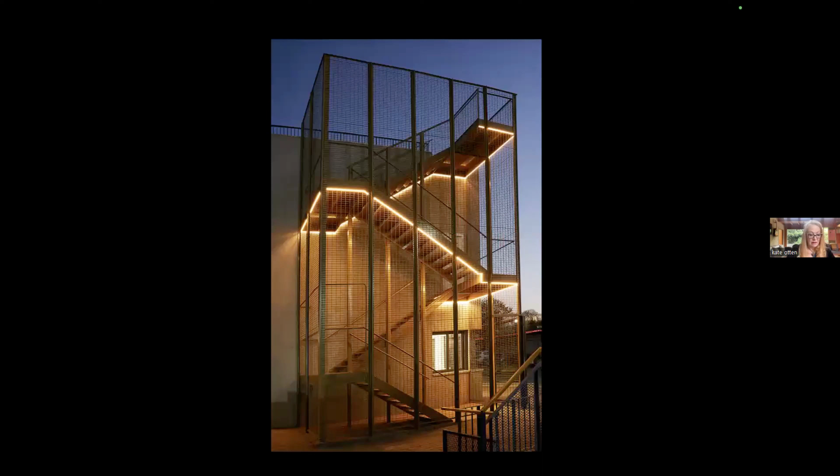Some have a graphic quality. This here is the fire escape stair at night, or the bridge over the M1 highway connecting the east and the west campus of Wits University. The graphic quality can also be captured in a photograph, a moment in time that frames a particular view, mood, or understanding of the building.

Material simplicity and a quiet color palette create a mood of tranquility at this image, which is of the Wits Rural Facility. Or this here, a suburban writer's retreat, this dollhouse at the bottom of her fancy pants Westcliff house. Or the formal reception area of this legal practice that we did their small office for.

This image shows how space can transform an atmosphere. This is the ceiling over a conference facility boardroom, which you can imagine could change the mood of aggressive capitalism to something much more inclusive.

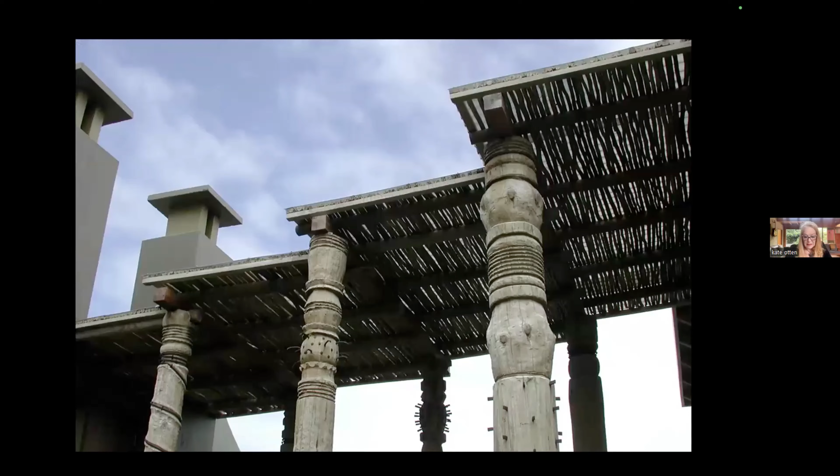The choice of craft and material is a specific response to the context of each project. Available materials, available skills, and how we can use these resources to express the idea of architecture.

You can see here, I mean, you'll see always through my work, gum poles, one of my favorite local materials. And then crafting these things has kind of moved it out of the ordinary and into something unusual and extraordinary.

Or here where the building or the materials respond to, so in Joburg, I'm sure it's the same in Durban, there's an awful lot of fear and worry about security. So this is a courtyard space that's got this kind of curvy cage over it. So while you can sleep with all the doors open, at the same time you can feel safe and secure, and see trees and leaves, and at night the moon, etc.

Or this image here where, instead of having an electric fence that buzzes all the time, we used stainless steel to cut out these kind of plant-like formations.

Animation of the building. So there's been through the work this kind of interaction with craftspeople, encouraging the different personalities within those engaged in the project to express themselves.

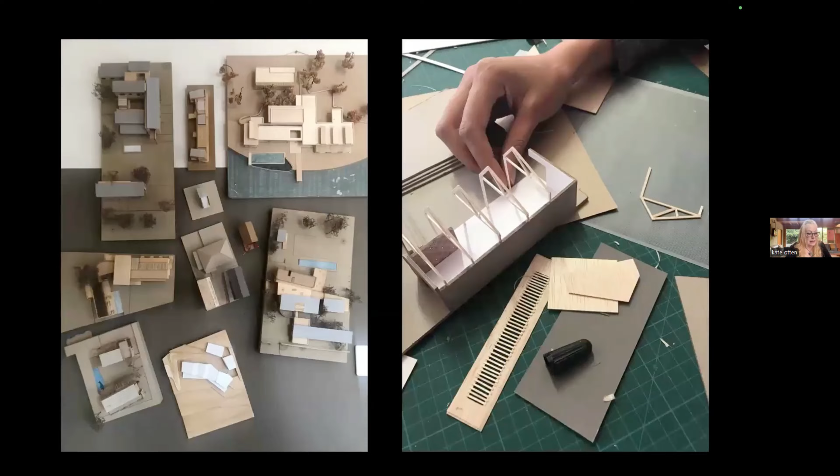We'll talk about that. So hand making is very core to how I operate. Our process of making architecture is iterative and moves between drawing by hand and digital drawing, and then back to hand drawing. We love building physical models and find them a very useful tool for both ourselves and for our clients, and I think models are also this kind of jewel.

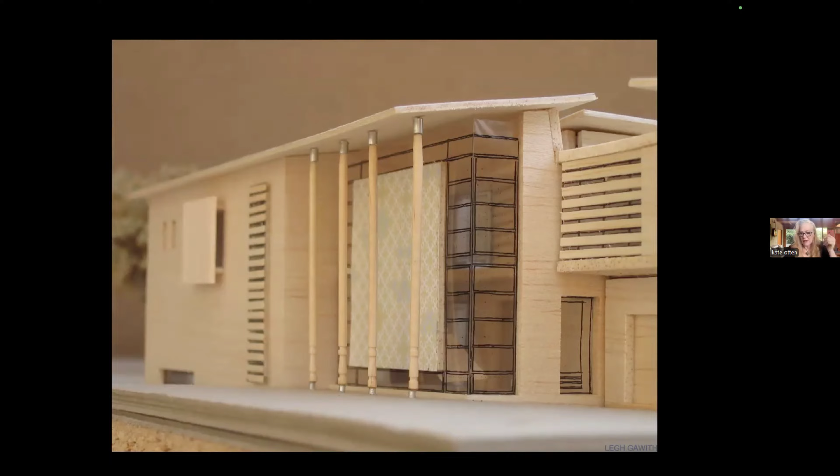When I present models to a client, I usually hide them, and then after having been through the drawings etc., it's kind of like letting the rabbit out of the hat. There's something exquisite about being able to carry your building around, I suppose, just by hand.

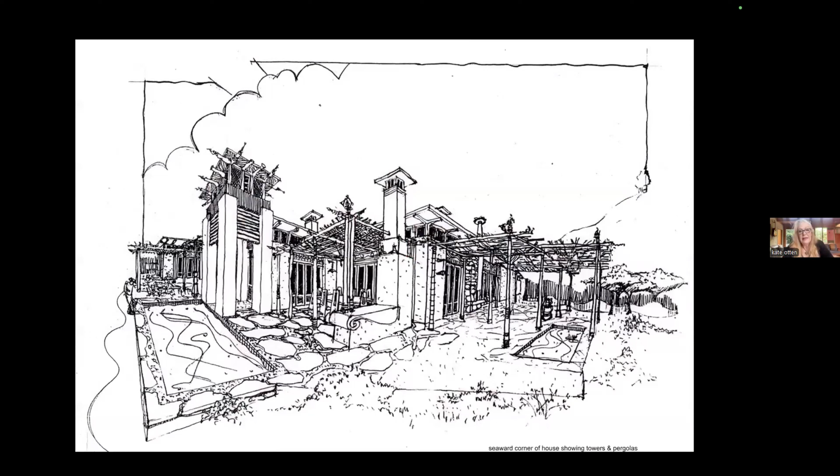So hand—I think it's this connection between hand, eye, mind, and the drawing and the process of drawing. And I've always been and continue to be a very firm believer in the importance of that. I can, as you can see, barely operate a PowerPoint presentation.

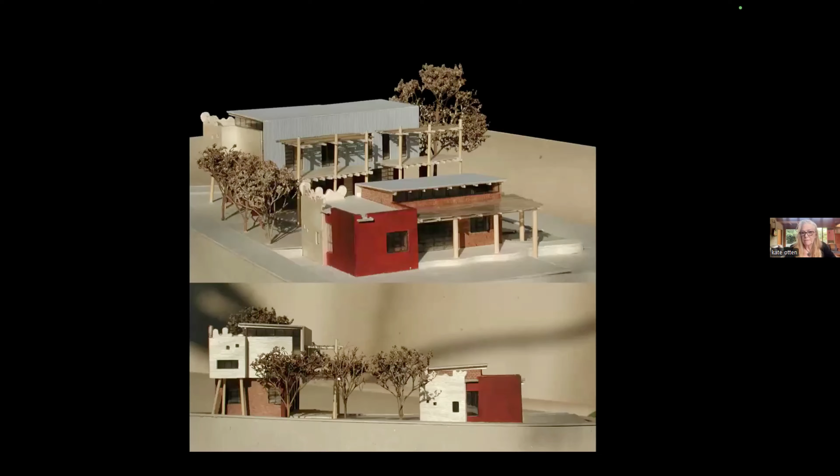No, I've got much better over the years, but I think there's something that only working on a computer you lose—something very particular about scale, but also about the action of which pen, which pencil, what paper, is it rough, is it smooth? How does that influence how you imagine space, together with making models—what triggers how you imagine space.

And I think this was very interesting, and something I often do: to work at a scale of 1 to 1, whereas as an architect you're always drawing things that are not necessarily representative.

So this, for example, we worked the graphics on the computer. It's a gate, the thing is sort of a bit squonk. It's actually a whole flat facade. I'm drawing on this gate, always the dogs lying around with me, and Lele is doing the ones on those.

So we then blew the flowers up, stuck them on, traced over them. The point being, to work at the scale of 1 to 1, to actually physically engage as an architect in painting. You'd be surprised how few architects can actually change a light bulb. I don't know that you should necessarily all be bricklayers, but to be able to physically engage with making, there's something really special about it. This was sort of a 2 or 3 day process, and Lele and I had a really good time. I think he really enjoyed it as well.

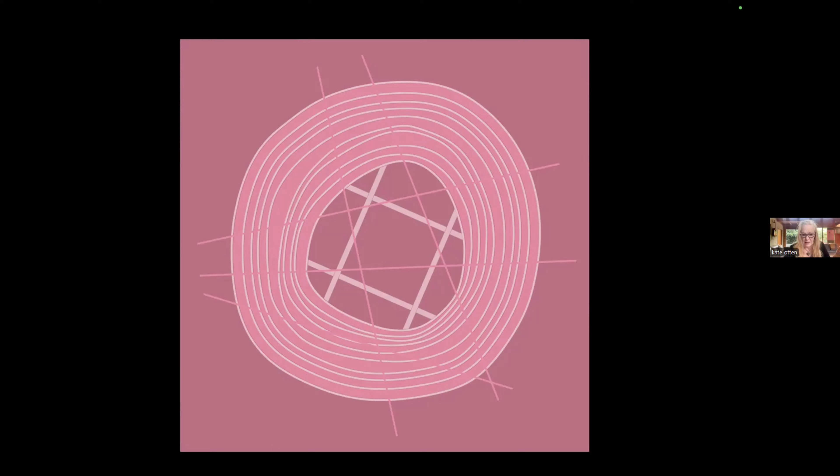And this is a graphic of that roof, which has been generated by a computer. I just think it's a very beautiful drawing. In fact, I think I should hang it on my wall. But what's interesting for me is to arrive at this in reverse is what is, in a way, its beauty, as opposed to having to try to get a computer to make that in order to make this - I think just doesn't work logically. So the hand and the mind and the human factor, I think, is all very important.

This is a mat, so that is the geology under the area of the Vredefort Johannesburg, where the great impact site happened, and how it was meant to be a mat that was part of the exhibition. Never quite happened - it sits now in my dressing room, which is very nice.

But how you can translate what is this diagram into that, which we computer generated, and then made 1 to 1 so that it could then be woven, kind of following a pattern.

And engaging also with artists. So these icons were made by Marco Cianfanelli, and we've sort of over the years had relationships with artists. Clive van den Berg is also one of them who we've often worked with. But I guess that brings another dimension to a structure - the idea of public art, or that you engage at different levels with the building, and it isn't always just this kind of blank glass facade.

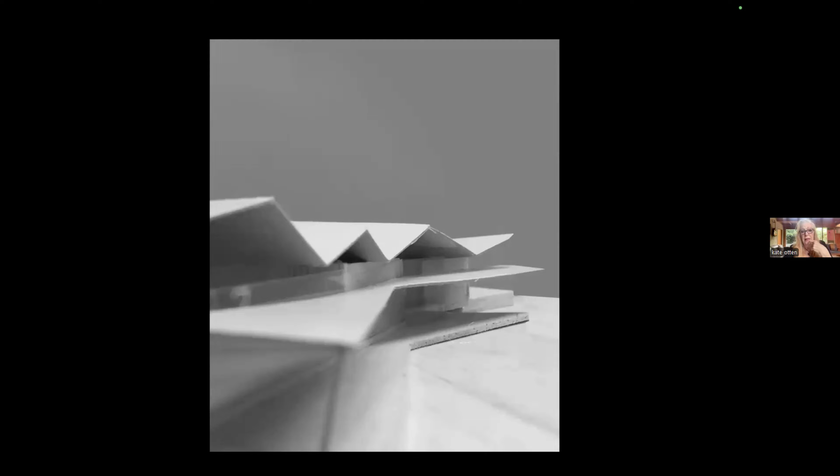Again, models, and there's a thing also for me about photographing models and just how you photograph buildings or moments, as I was talking about earlier, and this is kind of one of them. I think that we should create something so simple and evocative.

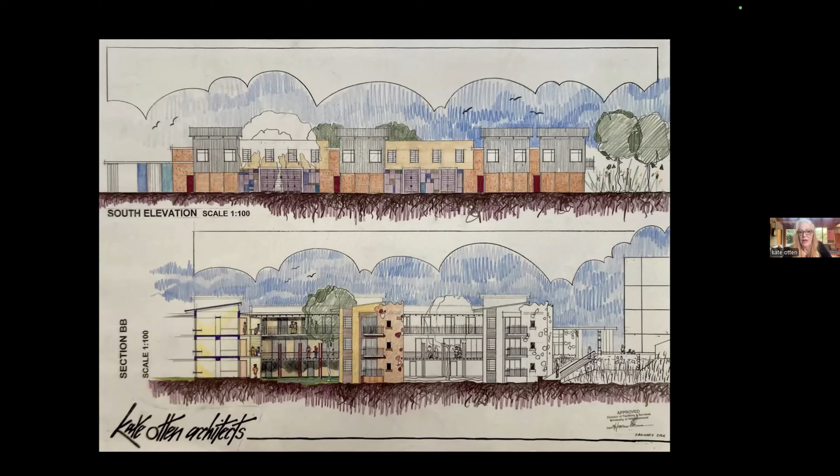And how we used to color in - this is me coloring in a presentation for Wits University for the International House Student Residence, probably 20 years ago, maybe more actually. And using lovely Derwent pencils that were given to me for my 21st. I think it's something that people just don't do. Or making this model, which is a lot more kind of cheerful and animated. And I think also about scale - so this is fabric, shweshwe fabric that's been photographed or scanned and blown up, and so you get this very lovely patterned effect that happens there.

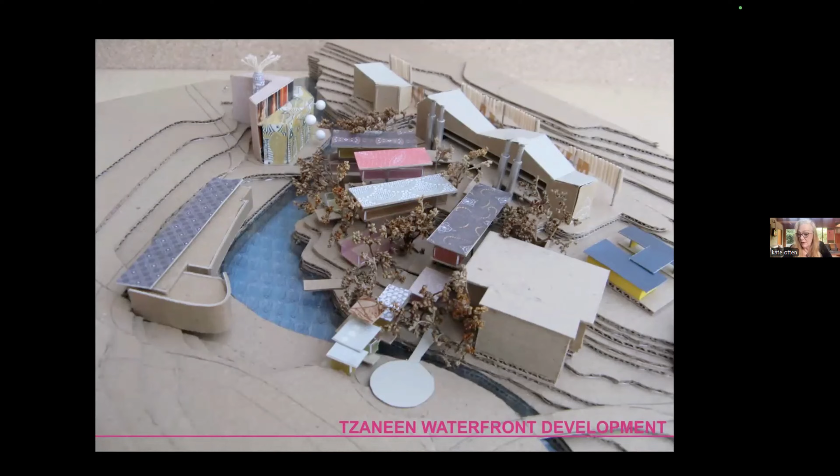Moving to also heritage buildings, which have been - so the women's jail is probably the first one that I did, that I think...

I'm going to read this because it's easier than mumbling along. We have a real interest in working with built heritage, which for us always raises the question of whose heritage, and involves particularly careful research, thought, and engagement, especially when working on important public buildings like the women's jail. We describe the work as rescripting, as it is not about slavishly restoring colonial edifices, but rather about revealing the story of these buildings and the people who inhabited them.

Also, I think, which is important in this building, and in other heritage work, is to suggest a future. Particularly important in the women's jail, as opposed to it being high architecture accessible to a few elite, to make a building that is really quite open and obvious to the public.

So this idea of jumping out, the building kind of jumps out at the confines of the prison. And that symbolism, done so overtly, was a very particular decision made. It also happens at the entrance to the Constitution Hill building, with the Hillbrow Tower in the background.

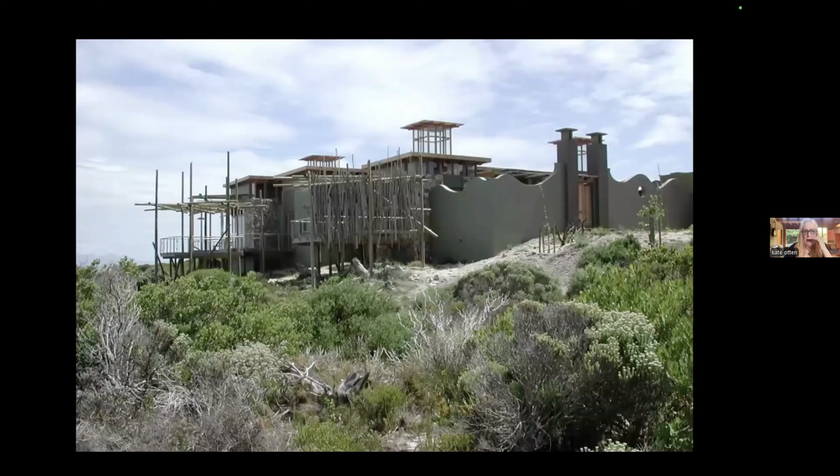The next few images talk about landscape and how buildings fit into their landscape. Here's this South African condition of fencing, which is exhausting. But the building has been designed to be fragmented and quite horizontal, using this in the Cape in Pringle Bay, using the colors of the fynbos so that it recedes and becomes part of the landscape. You see all the materials, the stone, etc., comes from the landscape, so it doesn't poke out as a big lump, and there's also interest in pattern and how that looks against the sky.

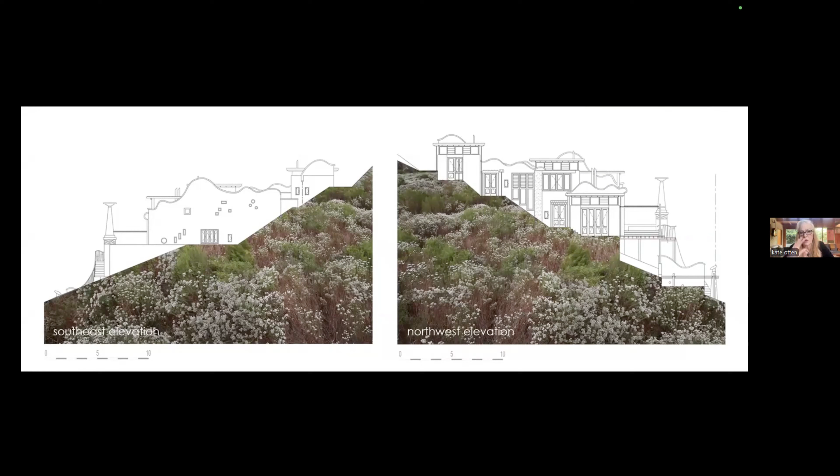This is Misty Cliffs, a similar kind of landscape but much steeper, and again all the stone used from the site, colors, etc. You can see the shapes of the structure reflecting the mountains it's surrounded by, as it wanders or steps down the mountain, informed by the surrounds, by the landscape.

Or this in an urban context, where this very long 25-meter lap pool, which is also a biopool, integrates with the building.

And here the public space of the street is integrated into the building, which is unusual in Joburg because people are so concerned about high walls and electric fences. So to invite the public in—this is often used as a place where people come for wedding photos, or just lots of social media images where people sit and pose, and it's rather lovely. This building is in Parkhurst, on a high street.

This line of the veranda is in fact the edge of the site, but instead of maximizing the retail space and leaving a very puny space to walk through, the buildings are set back so you walk undercover and do exactly what these two women are doing—linger and look—which is really what the retail part is trying to gain.

Materials, and the idea of the boundary—this is a retaining wall, on the boundary of quite a fast, busy road, Jan Smuts Avenue—so the building becomes a layering of plants and kind of disappears into the landscape.

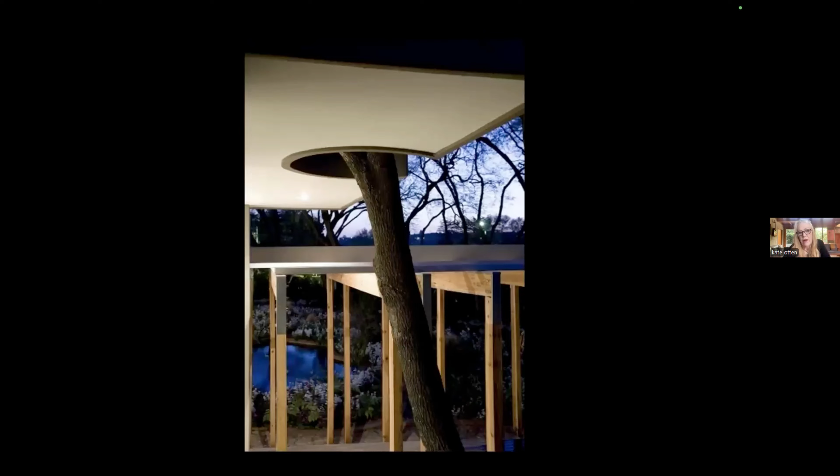So to do that, I think, is a very Joburg thing. And then the other way around, where the building can, if you like, yield to the garden, to the planting, to what is existing there.

That happens particularly at the Wits Rural Facility, where the buildings move and meander and wander through a lot of the existing indigenous trees. We only ever took away two trees, despite it being quite densely wooded - one was an exotic, and one was not endemic to the area.

And how the outside and the inside have this relationship. So having this large glass facade, which would normally be a cooker, but it's in this garden with all these beautiful trees. You get this wonderful dappled light and a wonderful scent from the gardens, from the flowers.

Using this landscape, inside and outside, you can create - this is a kind of small meeting space for where the partner would meet with his silks before court. You can imagine how the ease with which you might communicate is different to sitting in a very formal environment.

And the inside and the outside - here the roof goes from the inside to the outside, confusing that and inviting both one to the other.

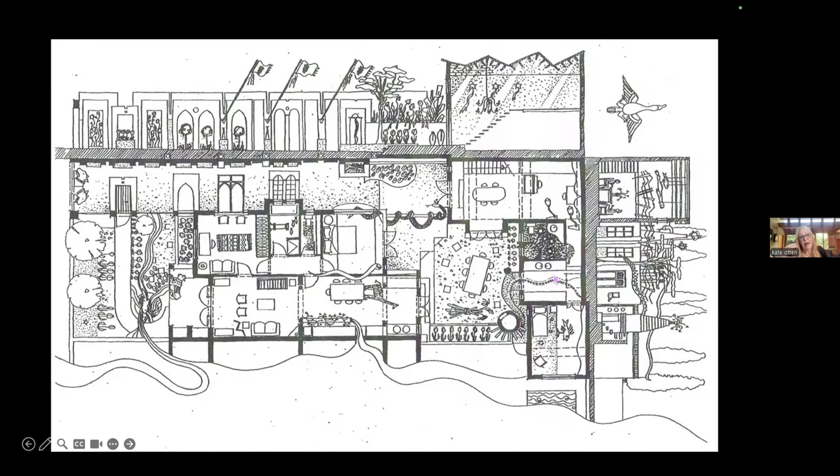And my fondness for creatures and animals, and everything that gets inhabited and thought about. The structure of this being an undulating roof done with corrugated iron, but in the opposite direction.

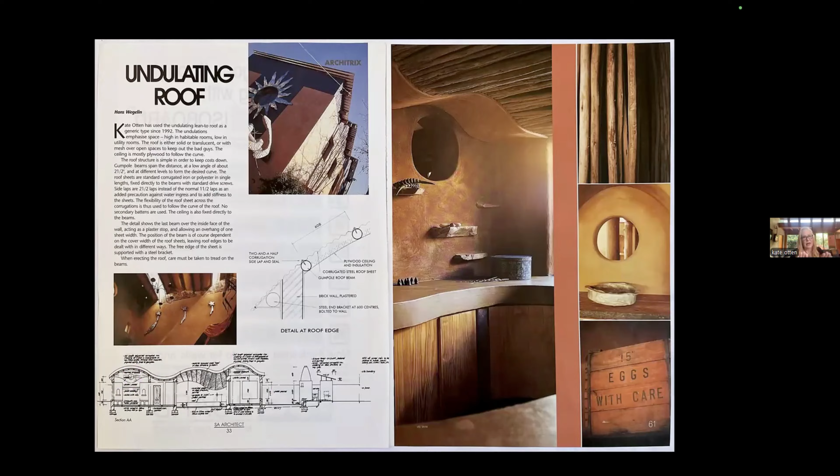So instead of cranking the sheeting, it actually just falls - you build a whole regular roof and then tip the whole roof.

That idea of how that worked then became something that we used in clients' houses, but also this very hands-on collecting of materials from, I suppose, demolitions or just unloved pieces on the side of the road.

The house in Utopia, which was a gift to my partner, so it was wrapped in a red ribbon. Wasn't such a loved gift, but nonetheless, we moved along from that - but there was our house in Utopia.

Here testing, you can see how this plaster is raked and how that became part of what is our house now. All these cantilevering stairs where you build in on the one side - you build them flat on the ground and then build them in as you would bricks or lintels, so that you can create a staircase that way.

A painting done by Adriette of what's on my pencil case.

So this here then is the property that I've owned - it's nearly not mine - that goes from the one street all the way down to the bottom of Melville, a very steep hill. This here was built out of all the rock that we found on site, small pieces of rock built as a double skin as you would a brick.

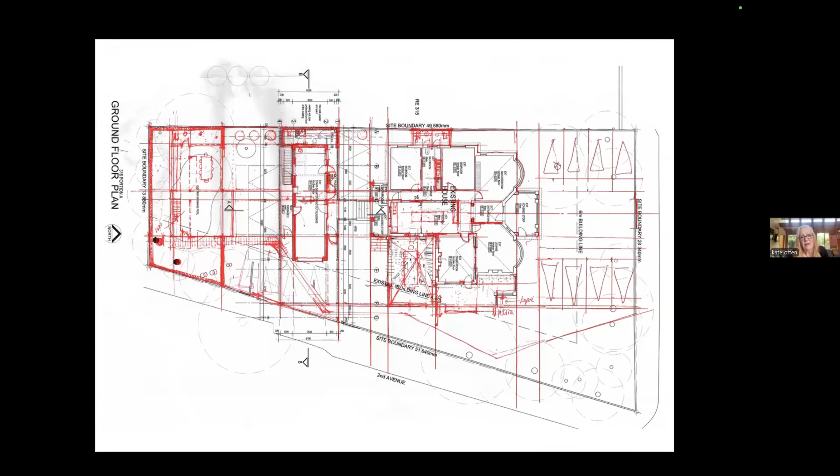Very quickly, a historic building that we bought had been kind of messed up. We took out all the wrongdoings, the bits of add-ons and the swimming pool, and then completed the little picture of the house. On the outbuildings, we encapsulated them with the structure. So working again with heritage, but now in an unusual way.

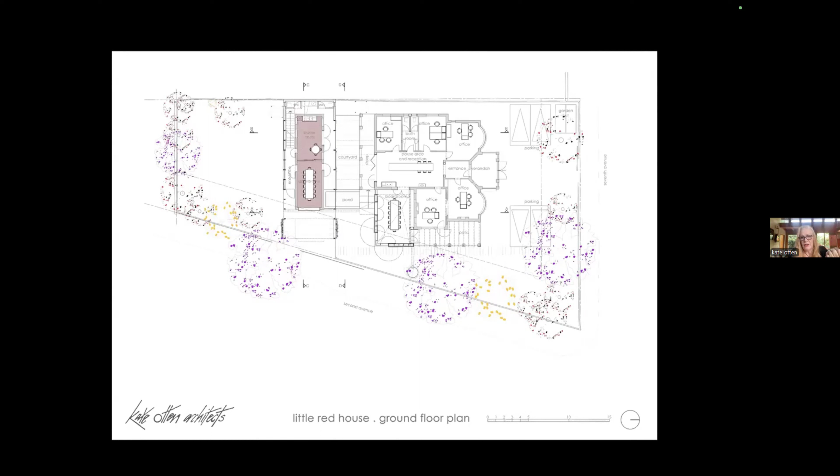I'll just run through these very quickly now that you know what they are, because I think it's quite a nice quick series. Then the section, so you see how that works with this add-on piece - I keep pointing at the screen here - and then the encapsulation over there.

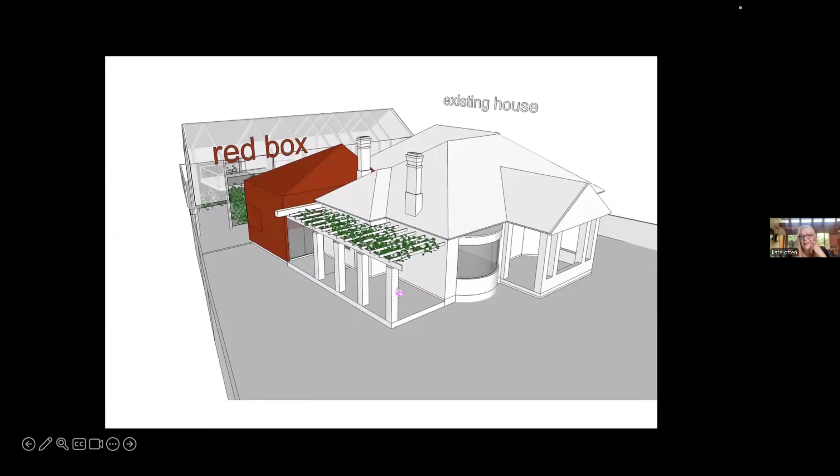And these two very short videos are really funny because they're not videos at all, but they were done a long time ago, and it kind of shows how we do what we can with our SketchUp or whatever animated computer equipment we have.

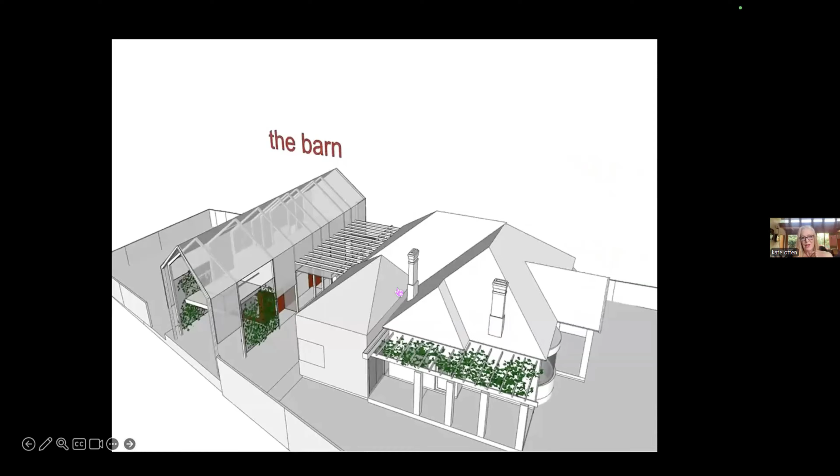And this one's my favorite, particularly with respect to how it ends. So there you see the barn with its clear sheeting encapsulating it, the space between the buildings. Then all very suddenly, bam, there it is. And so that then is the inside of it - you can see how the roof goes over the sides, the space between. That shows you very clearly the existing outbuildings here and then the new structure that goes over that. It was only ever briefly our office.

Very sadly, we won't go into too much detail. You can see again, whilst all the buildings are different, I think you can see the kind of references and ideas working through them.

This is our house, where my partner Paris and our daughter Paloma live. I decided I was sick and tired of civilized lawns, so I made the whole place into this fantastic meadow of poppies and grass, and plants and flowers. I think about how you live in a house and how it changes around you, and that's particularly easy to do in gardening. Gardening is such a long painting in a way, you change, the seasons change, things get big, they die. It's a wonderful sort of process.

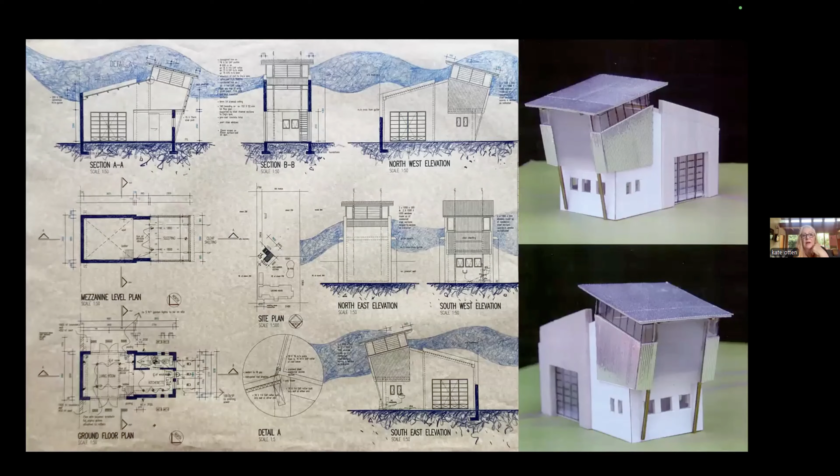Of course we needed a cottage, so this here is Slopey Cottage, which over the years has slowly been taken over by the uncivilized garden, and a tree house, which also over the years eventually left because it got taken over by trees.

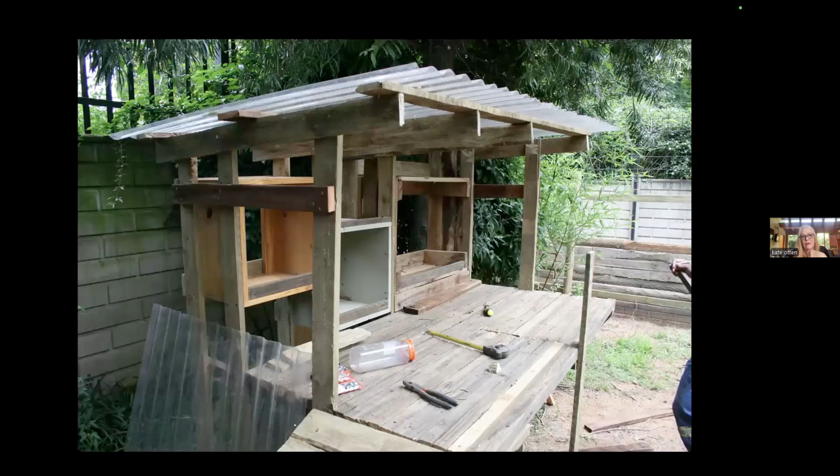And the chickens also needed a house. So this is their house under construction, and this is them in it. You can see they even got an awning and a ramp so they can get up. There's Big Mama going off to make her eggs.

Our farm, which is in Parys, or outside of Parys, soon also not to be our farm outside Parys. This started as a reference, which you'll see in the last series of slides, where driving between Joburg and Parys and thinking about this Vredefort Dome and the mountains and how those two relate became very much part of the last part of this presentation. And this here is the future, our house, but that's as much as I'm prepared to say.

So then I'm going to very quickly go through this, because I need 10 minutes for the other.

I just want to talk about stuff, the other things that we kind of engage with as a practice.

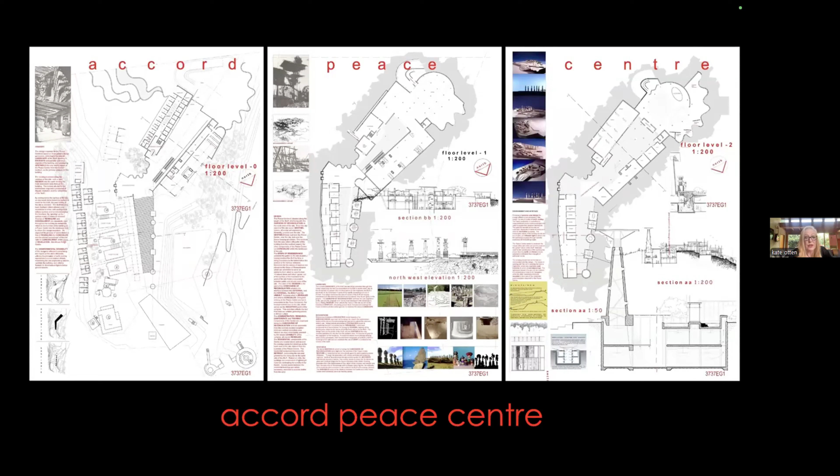Competitions, which is a very interesting way of putting your work out there, but also challenging, seeing what other people are up to, engaging. This is a collaboration that we did. I think doing projects, some of them will get built, some of them won't, but I think it's a very interesting process to engage with.

Luyanda had already started the hard work of transforming SAIA. Luyanda, Ruben Reddy then Vice President, Mtembeni Mkhize then CEO, who sadly passed away due to COVID, and I were a tight team trying in every way to continue and magnify this transformative work. It's no easy feat, I can assure you, and I think, Skura, you really have stuck around, and I know you've done lots in this regard.

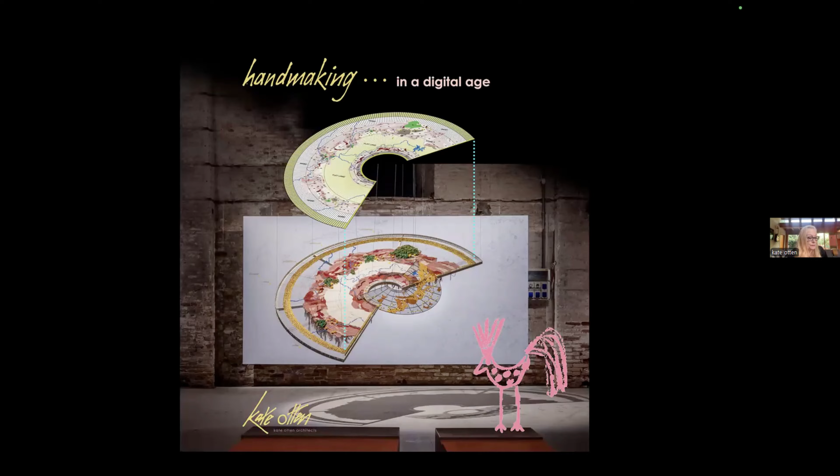For La Biennale, we imagined a tapestry of this story, of this place we call home and where I live. This conceptual image is a photograph of my mudcloth scarf, shaped into a ridge with gold thread woven through it, hovering above a leafy shadow.

We started to trace the landscape, the topography, the contours that describe the shape of things, and slowly, iteratively, we arrived at an arc that followed the curve of the gold mines along the ridge.

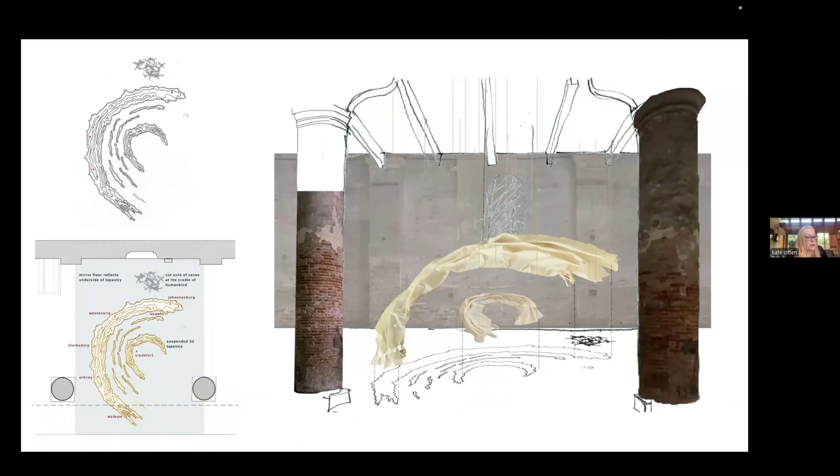From calico fabric, we made ridges held together by pins, then photographed, cut out, and suspended them digitally in a hand-drawn image of our designated exhibition area.

Delving still deeper, we traced the settlements, apartheid settlement patterns of green, wealthy, privileged areas, and parched, treeless, poor townships, with mining waste dividing the two.

A digital graphic was manipulated to represent the pattern of the arc-shaped ridge, then colored, and rivers, vital to the extraction of resources from the earth, drawn in.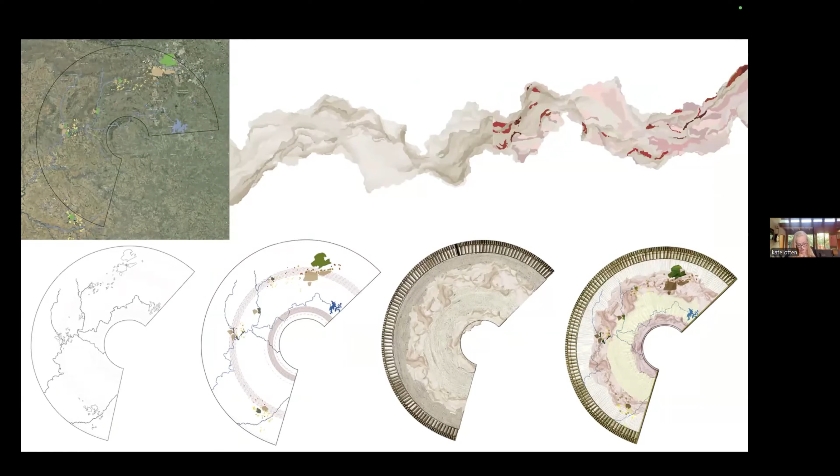The loom, designed to be transported in 3 parts to the Karoo, was cut out of cross-laminated timber, then holes laser cut for the pegs to hook the threads.

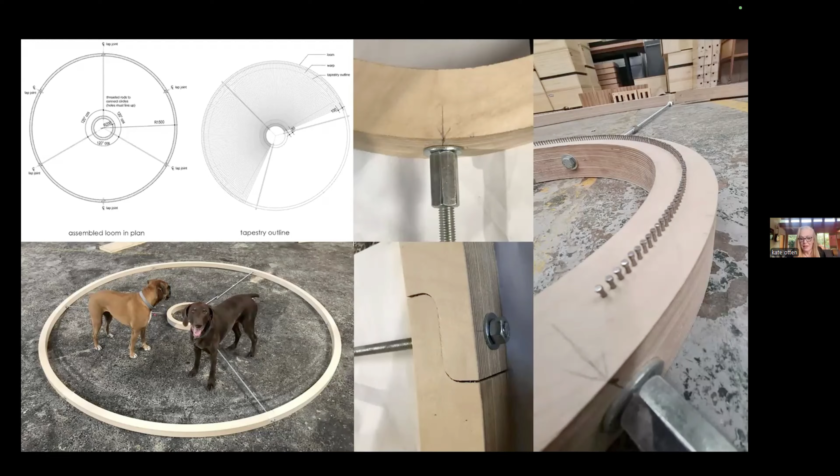Nobody knows exactly what thickness of thread will be chosen, how close to the digital drawing the outcome will be.

The pattern is followed carefully, but it is skill, intuition, and embodied knowledge, fine-tuned over years of practice, that determine the final edges and shape of the ridge.

The mohair tapestry is imagined as a cloak to wrap the body for warmth, with gold mines represented by yellow pom-poms and water courses by blue threads.

When the tapestry is cut loose from the loom, it is no longer taut. It collapses slightly and needs to be restrung into a new frame and tightened into shape.

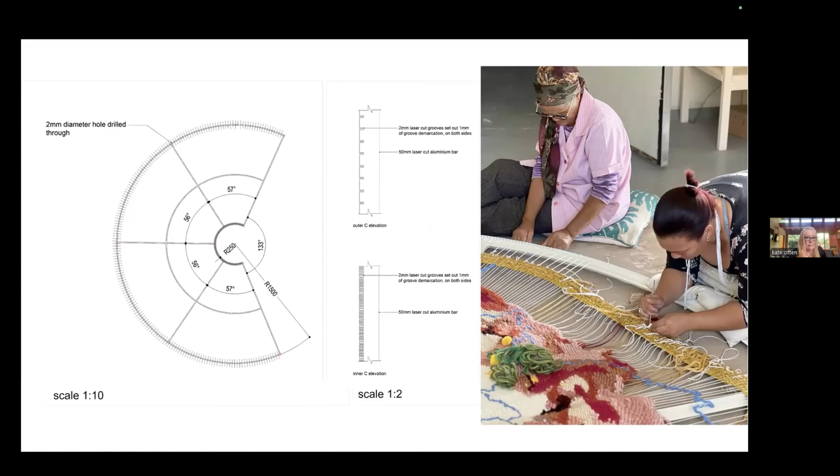Threads from the weft of the tapestry are left long and hanging, tempting you to touch, to feel the underside as you move quietly around the piece. The story of threads is told through making, by many hands, where intuition and embodied memory narrate, where the play of light and shadow, color and pattern animate a collaborative process of healing.